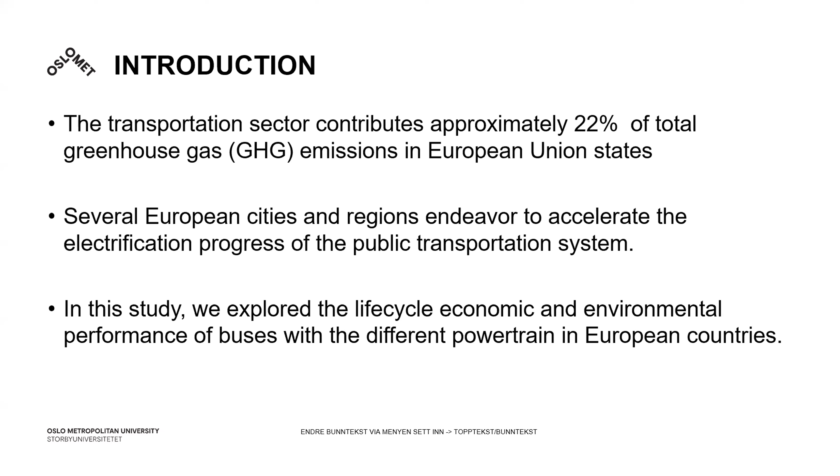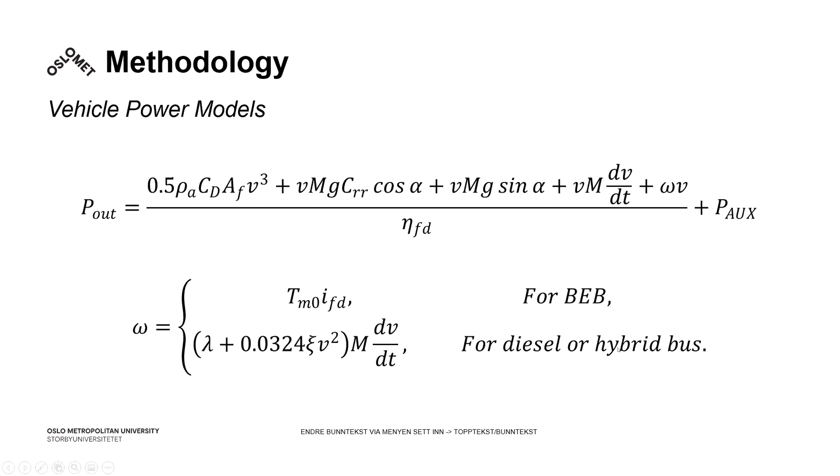First, we present the vehicle power models used to simulate the energy consumption of electrical buses and the gas consumption of conventional and hybrid buses. This is a typical power model widely applied to estimate energy consumption, with separation between battery electric buses and diesel and hybrid buses, which is widely used by existing researchers.

Then we introduced a model to model the auxiliary load based on different temperature and location in different countries. This model includes several parameters.

The ICL indicates clothes insulation value, which depends on how much clothing you're wearing, and TCL is the semi-comfortable temperature of the passengers. So we can calculate the desired temperature of the cabin of the buses, and based on that, calculate the auxiliary load we probably need for the electric buses.

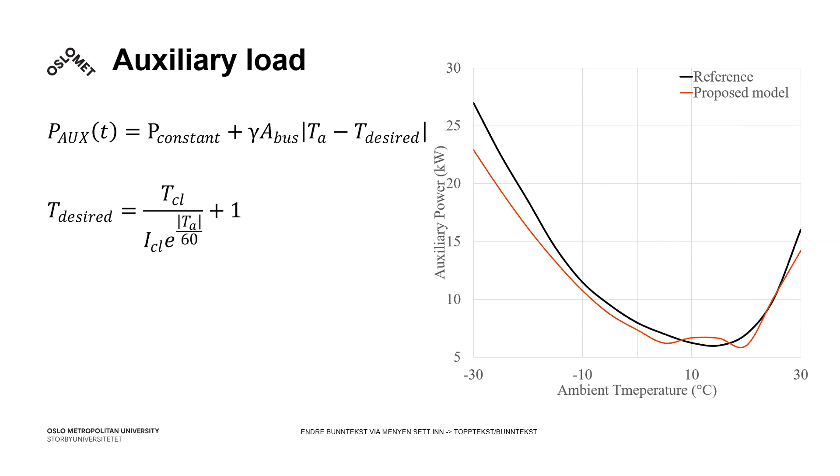Next, we model the energy consumption of the electric buses. Other than the vehicle power, there are still some losses based on current and voltage, so we use this formula to calculate the energy consumption of the electric system.

We compared the model with the ground truth data, which is collected from China, and we can see the model captures the trend of the energy consumption.

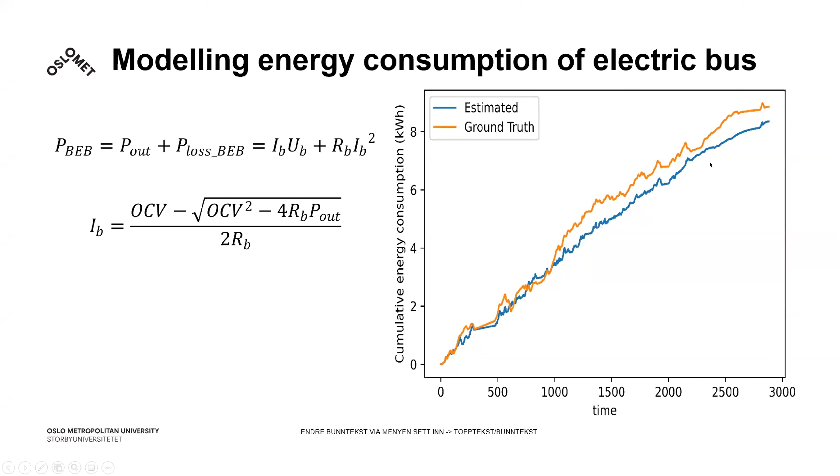Then we conducted a simulation. There are several assumptions. First, we give the electric vehicles a mass penalty weight, which is based on the battery size, where C0 is the battery size.

Based on the daily operation hours and mileage of the buses in different countries, according to the ZeEUS report, a European project which evaluates bus performance and daily operation characteristics, the electrical buses are assumed to charge the battery when the state of charge is between 30% and 40%, in order to maintain good battery life performance.

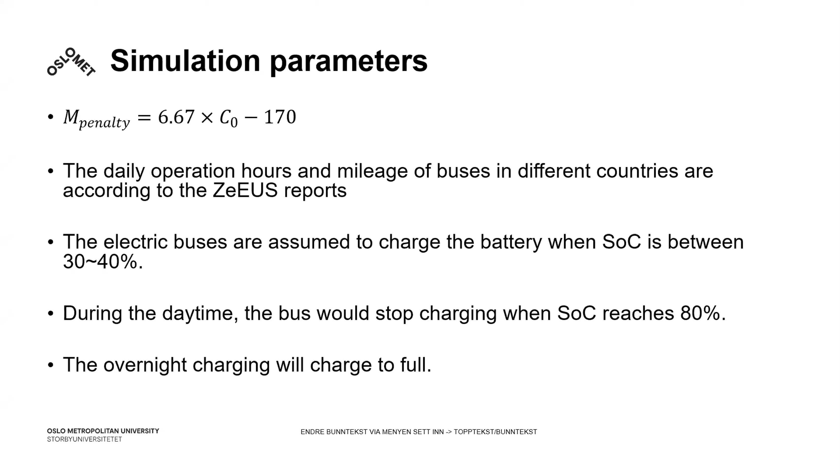During the daytime, the bus stops charging when the SOC reaches 80%, based on our real-world data from China, and the overnight charging will charge to full.

Here's the table showing the technical characteristics of the bus powertrains. These parameters are based on existing research, may not be the most recent, but from around 2017 to 2019.

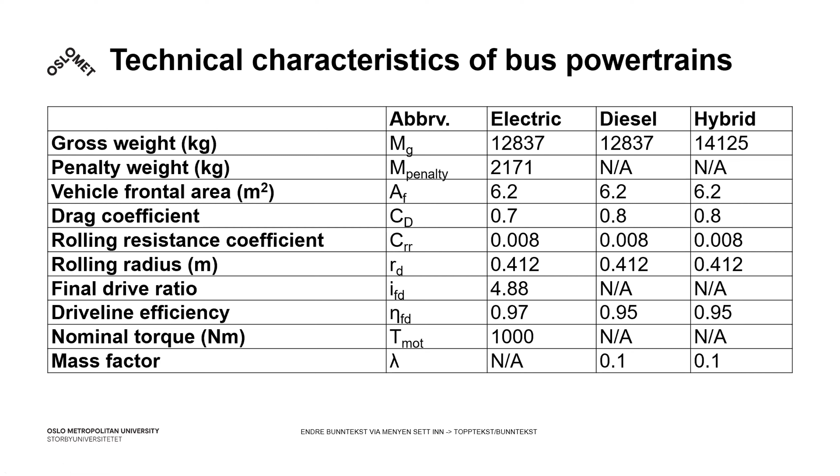In this study, we considered 4 different driving cycles: E11 and H550 from Finland, Braunschweig from Germany, and the Millbrook London Transport Bus driving cycle from England. We can see they have different characteristics, different maximum acceleration and maximum deceleration, and most importantly, different idle times.

For example, the London one has 30% idle time, which means it has a lot of stops to pick up and drop off passengers.

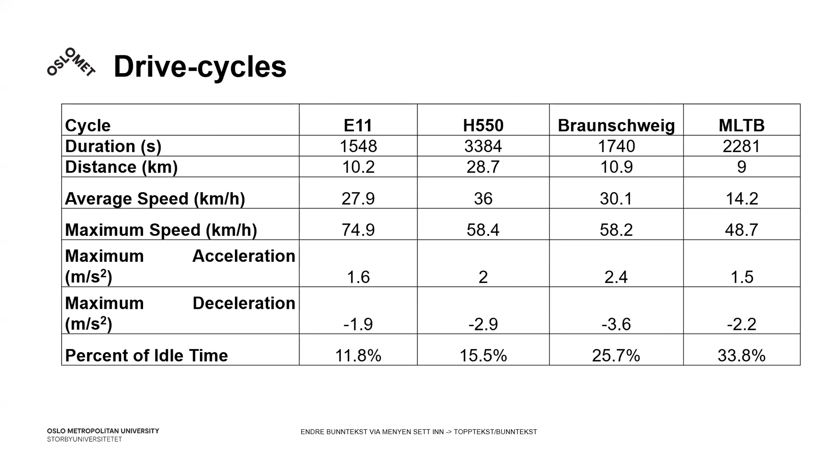After we do the simulation, we input the results into the life cycle ownership cost models. We annualize the life cycle cost by dividing by the annuity factor and the service life of the buses.

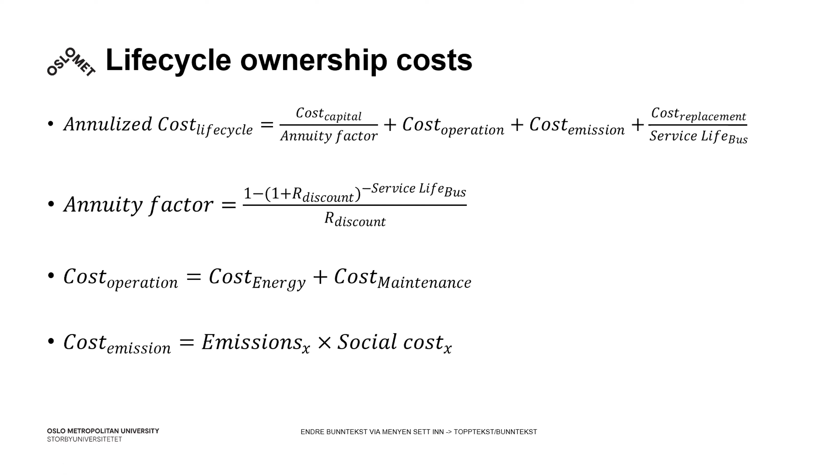The cost emission is the different emissions, for example CO2 and NOx, times the social cost. The social cost varies by country sometimes, but in this study we used values from existing works, so they don't vary with countries. That's a limitation of this part.

We also calculate the cost of replacement, which is basically about the battery. The battery life for each country varies based on their daily operation and weather.

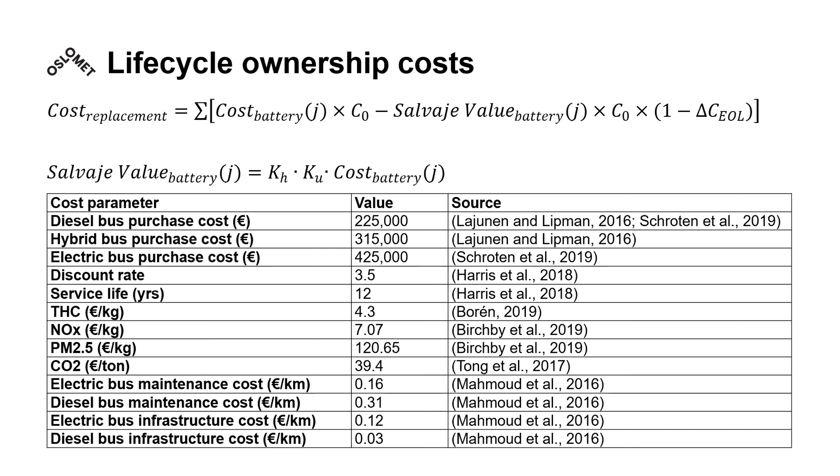The salvage value is based on the NREL report, which provides 2 parameters, KH and KU, the health factor and the used product discount factor respectively. The end of life of the battery is set as when the capacity loss reaches 20%.

That's basically because of the energy mix. Some of the countries generate dirty electricity, so the dirty energy may not lead to better performance.

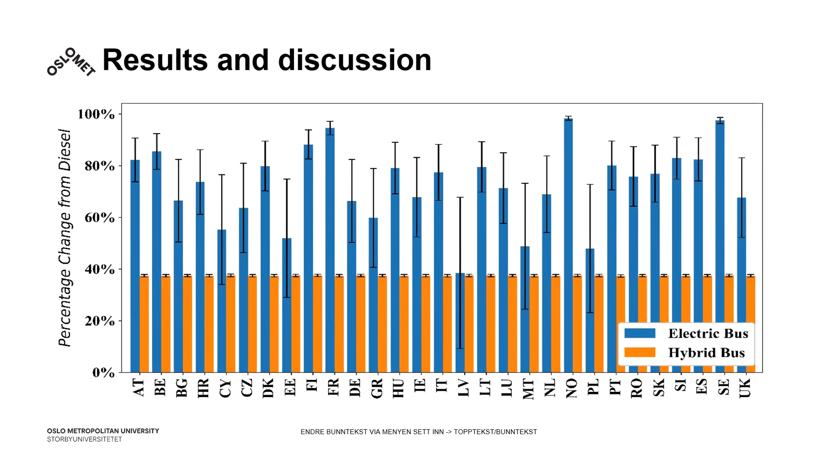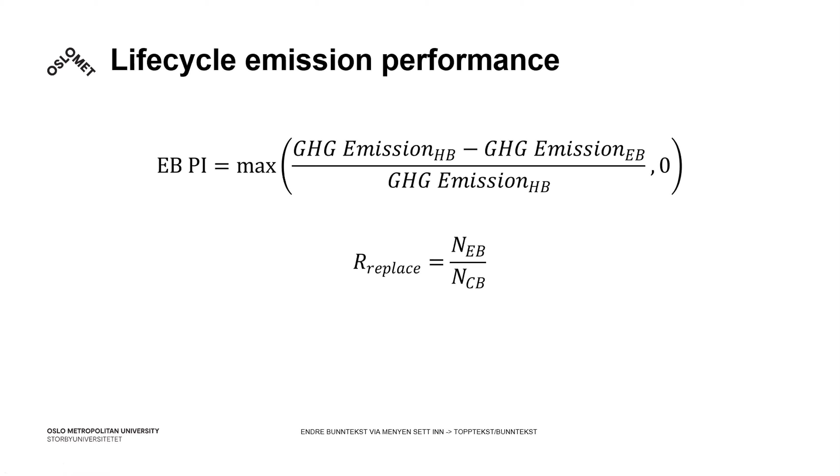And we also introduced the replacement parameter. Here we use the number of electric buses divided by the number of conventional buses. Sometimes, in some cases, we probably need more than one electric bus to replace one conventional bus. Usually, one hybrid bus can replace one conventional bus in the public transport system while maintaining the same service quality. Therefore, only different replacement ratios of electric buses are considered in this study.

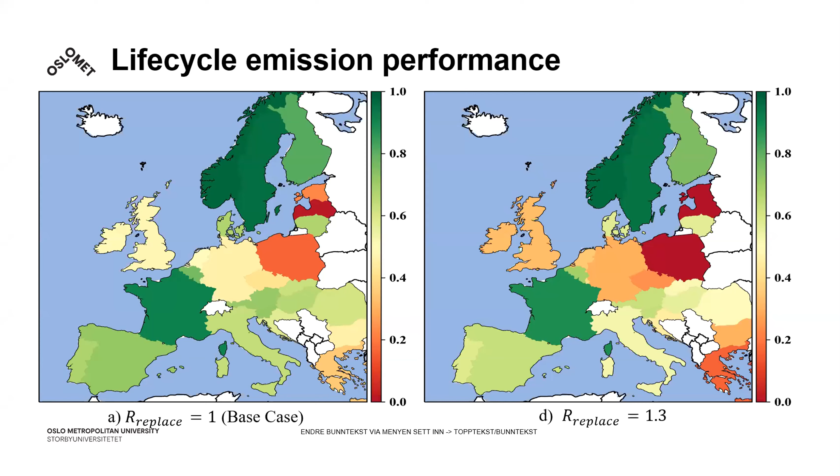Considering existing constraints of electric buses, a public transport system mixed with hybrid buses and electric buses can be a better solution than a purely electrified system, since the mixed system can have a lower replacement ratio to maximize the environmental benefit of introducing electric buses.

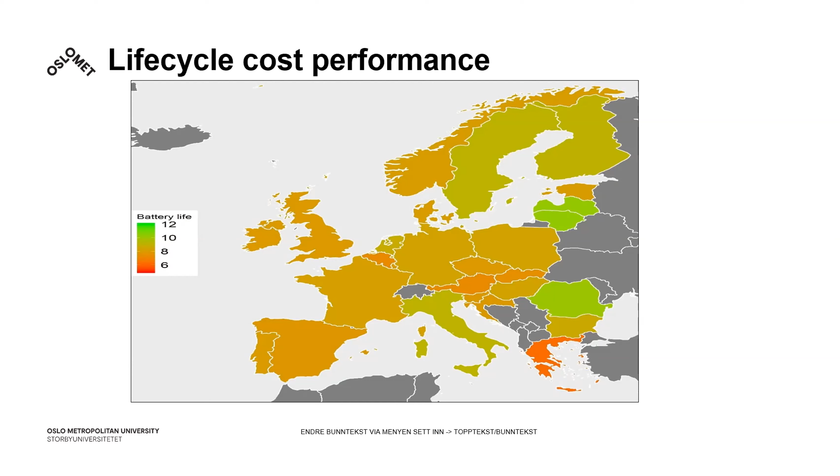But some cases show that electric buses in several countries have the potential to outperform diesel buses in terms of life cycle total ownership cost under specific conditions. And based on one lesson from Germany, conducted by Buehler and Pucher in 2011, public transport service should be financially sustainable while satisfying social needs.

Therefore, a public transport system with both battery electric buses and hybrid buses is a potential approach to make the system both financially and environmentally sustainable. So that means we can probably reduce our incentives from the government.

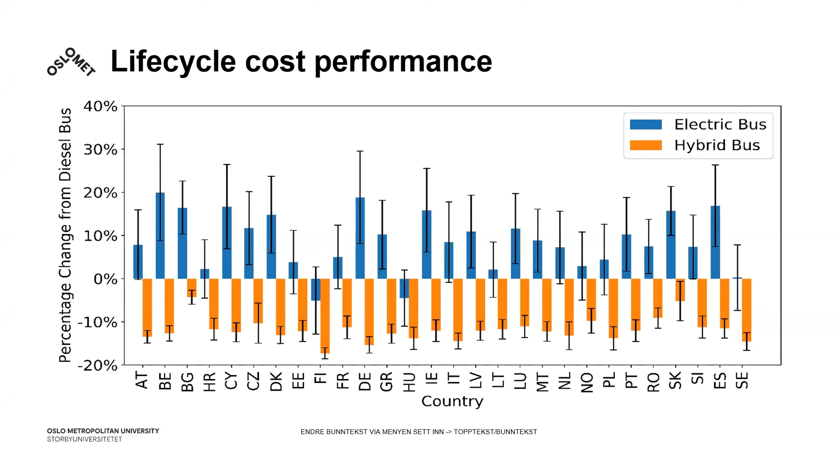In order to investigate the situation, we conducted a sensitivity analysis by varying the energy consumption price, the energy price, and the emission from the electricity.

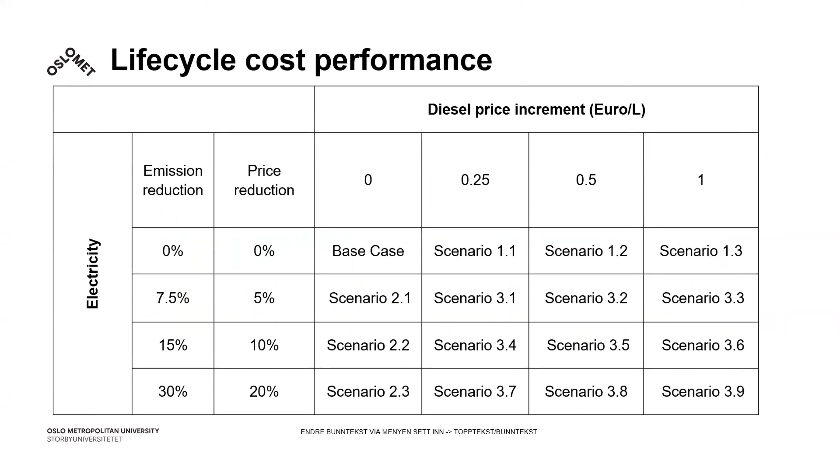So the result shows that without further financial support from the government, hybrid buses would be the best solution for most countries, considering both the economy and environment benefits. However, in the real world, the government would always introduce incentives to support the local application of new technology.

And of course, battery and renewable energy generation are maturing very fast. Adjusting the pace of replacing buses in the public transport system with battery electric buses, according to local conditions, can maximize the benefits of transport electrification without sacrificing economic performance.

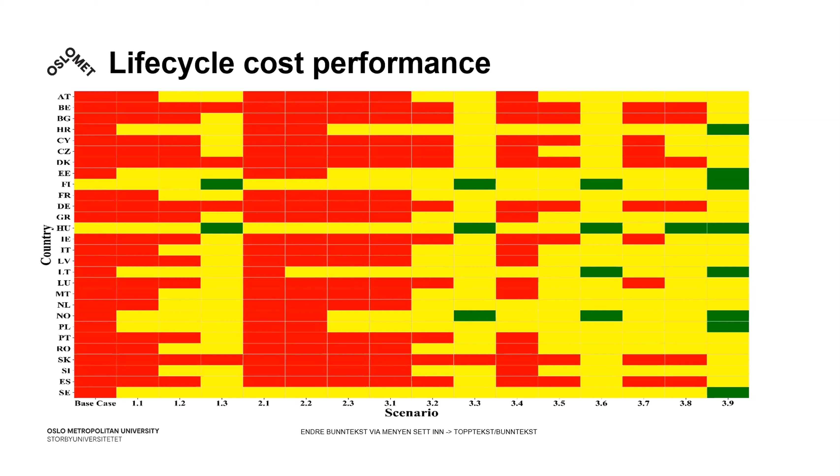That's the last page. So in conclusion, in this work, we proposed a framework which integrated the theoretical model of human thermal-comfortable temperature into the energy consumption model. And we also considered the weather and daily operation characteristics and the energy mix of different European countries to investigate the life cycle cost and emission for different buses.

The public transport system with both hybrid and electric buses can be a good compensation between financial and environmental needs. And also, several EU countries have the potential to reduce or remove the incentives for electric buses. That's all for my presentation. Thanks.

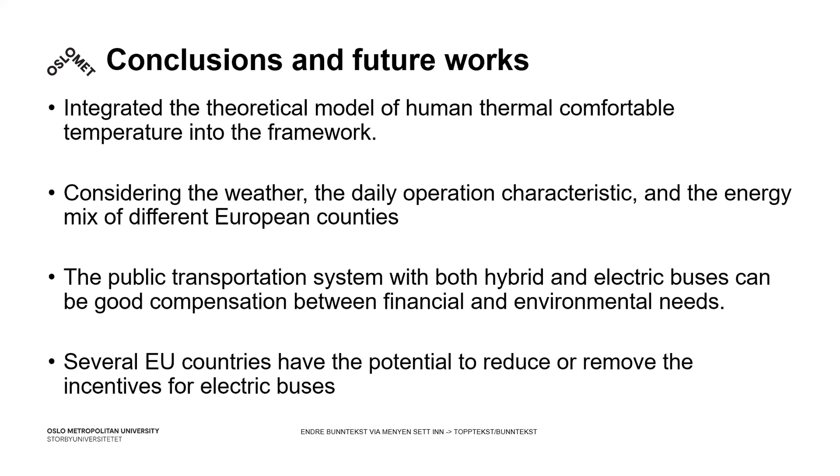Okay, thank you, Chaoru, for your presentation. And this is a very big study. I have already seen two questions, and probably you can take a look and respond to the audience. Yes, in the chat box. Yeah.

The first one is regarding the maximum acceleration deceleration, around 2 meters per second, which is very small compared to the traditional cars.

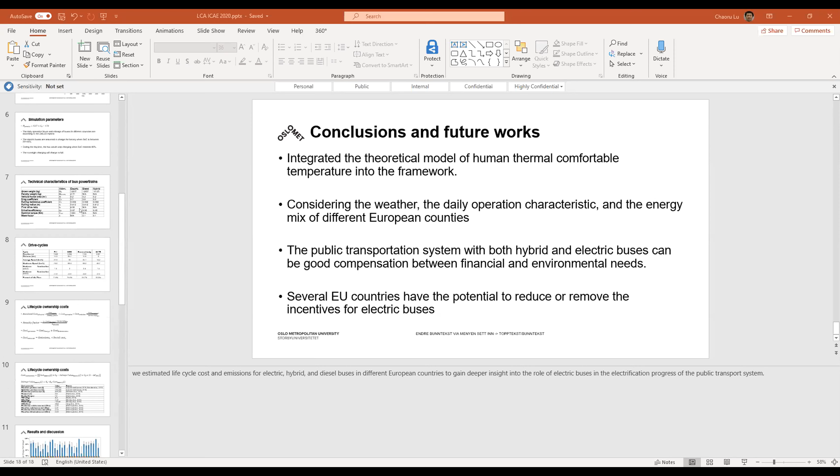May you please introduce more about the calibration process? You have a few numbers like 1.6, 3.6 as the acceleration deceleration, which is indeed quite low compared to for the car. They have maximum deceleration as high as around 7.5, the absolute maximum for most cars.

Yes, actually for the E11 and H550, there are 2 bus routes running in Finland. So that's the drive cycles from those 2 are from the real world data. And the other 2 are basically used for the estimation of the bus driving range by European countries.

Actually, I didn't calibrate those models. Ideally, I wish I could have the data from different countries, to have the driving cycles from different countries to run the model. The real case is that I only have 4 at this time, but I will seek for more. Okay, for the second question, what's the meaning of the social cost?

Actually, the social cost is the harm that the emission would lead to. For example, PM 2.5 would lead to some health issues for people, and CO2 would lead to global warming. So that's determined by the government and several research studies.

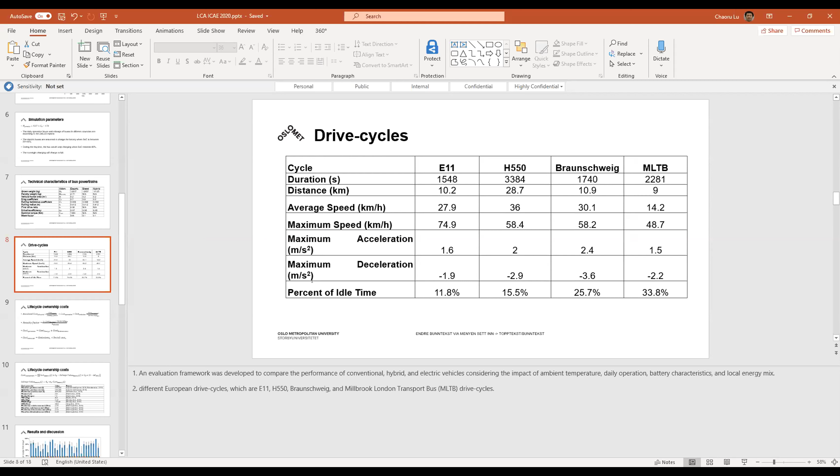Yes, true. And for the social cost, you use the product of, I think on page 9, can you go back to page 9? Yes, I think it's here for the social cost.

Yes, that's one, the cost. You have social cost times emission. So the product of emission and social cost is the cost for emission. So why do they multiply emission by the social cost here?

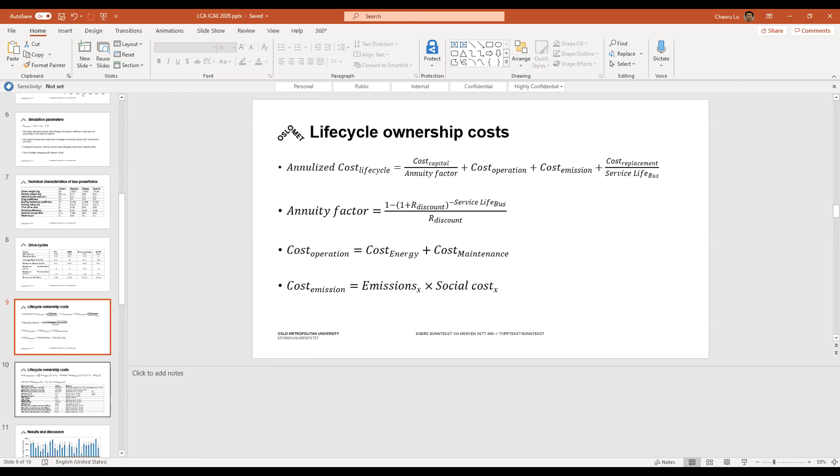Actually, from the model, we have the emission in kilograms of different emission types, so we times it with the social cost.

Okay, understand. And another question from the audience, also in the chat box. Because you mentioned your assumption is you will have charging activity when the SOC is between 30 and 40%, which I also agree is a very strong assumption. So do you have any basis to support this data, like 30?

Yes, actually we have the real world running data for this. Of course, the buses would finish the service line, so they have 10% variation there, but they set it to no less than 30%.

Oh, that's the limit, right? That's the lowest, the cutoff for charging. Because I think...

For this question, they also mentioned the depth of discharge will affect the degradation ratio of batteries. So usually we have opportunity charging, and in Sweden for bus line 55 in Gothenburg, they use station charging. They charge all the time no matter how small or how big the battery SOC is. For example, after a journey of less than 15 kilometers, even if the SOC level is around 75%, which is very high, they still charge, as long as there is the opportunity.

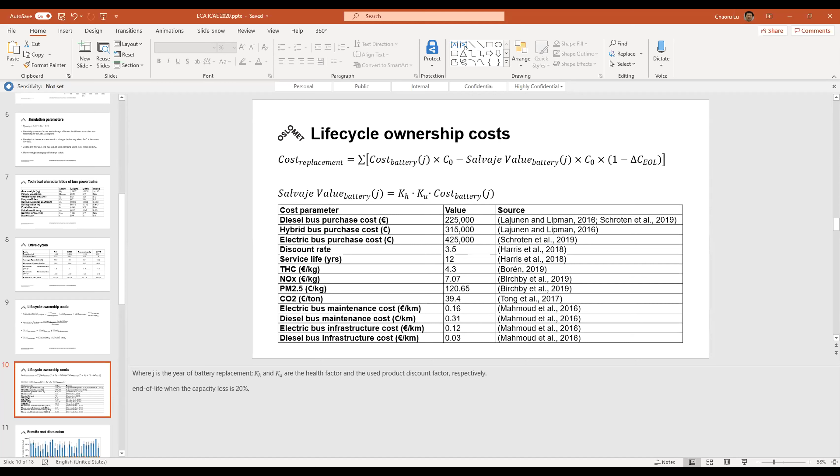Okay, if no other questions, I just have one last comment regarding your salvage value for batteries, because I read a report, I think around three months ago, from a company, they issued a newsletter. I think the salvage value for batteries nowadays is around $40 per kWh.

Because batteries are used for energy storage purposes, they use those used batteries for building energy storage purposes, and they sell it to the building managers for like $40 US dollars per kWh. That might help for your calculation, so after this meeting I can pass that report to you.